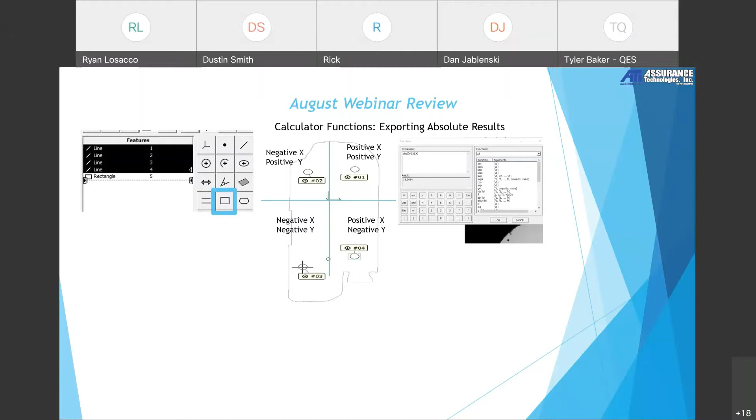So you can see here, when you do an origin to the center of the part, you have your negative X, positive Y, all the locations, but when you're reporting true position or some other dimensions, we can use the calculator function to convert those negative results into positive results for your reporting. I'll also show you, we're going to be talking about proper skewing today to align your part, which might help some of you who have a wrong skew or wrong origin where all your numbers are negative. Hopefully the skewing will help you there.

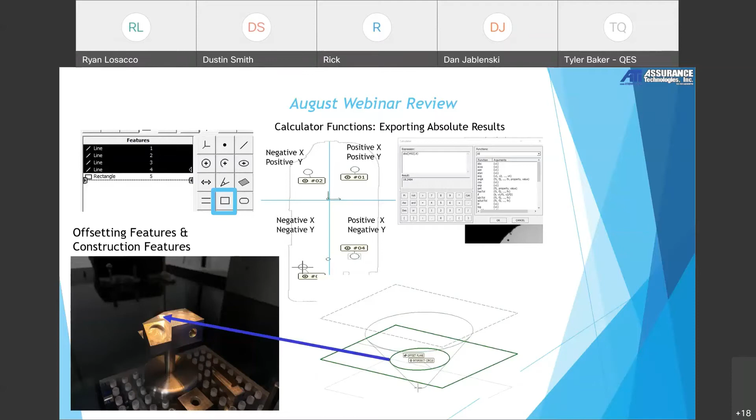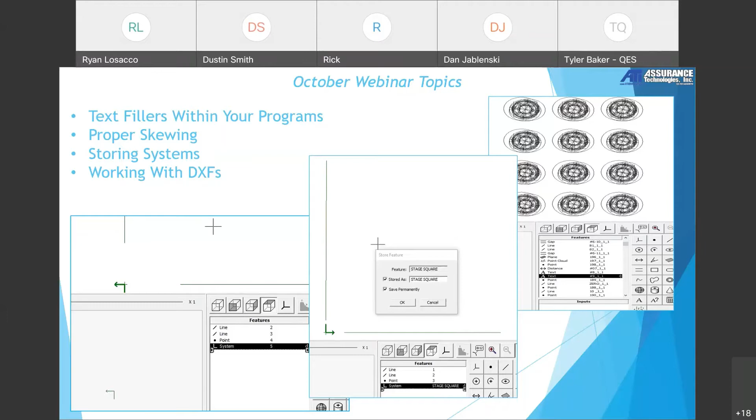So here with text fillers, if you are using the MicroVu for, let's say, half your dimensions or all but a couple dimensions, when I export to Excel in column B, I have all my actuals that I'll copy and paste to my official inspection report. But it always kind of annoyed me that if I was going to do some caliper measurements, or I needed to put it on a roundness tester or a Contracer or whatever it might be, I always had to copy half of the Excel sheet, paste it, and then go to the next form and copy and paste it.

What I started doing is inputting text. So if you do the A without a question mark, the text, and you label it whatever dimension you have going on, but you leave the text blank, then you can export that text. It'll leave a blank spot in your export to your Excel.

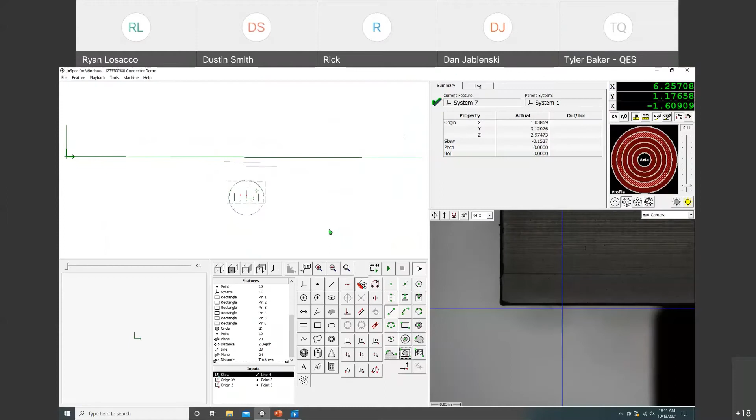So let's go ahead and jump over to InSpec here. I've got this program that I ran. I can move over here and show you the actual part so you guys see what's going on. Let's get that guy in focus. So I got this little headlight connector or whatever it might be. I have all my pin 1, pin 2, pin 3, and all these other dimensions going on here.

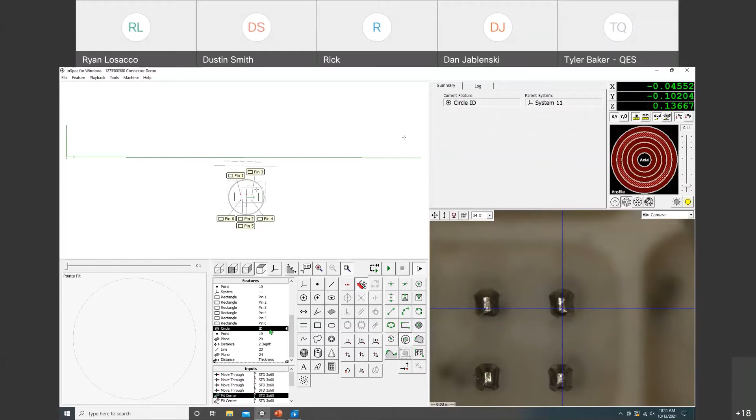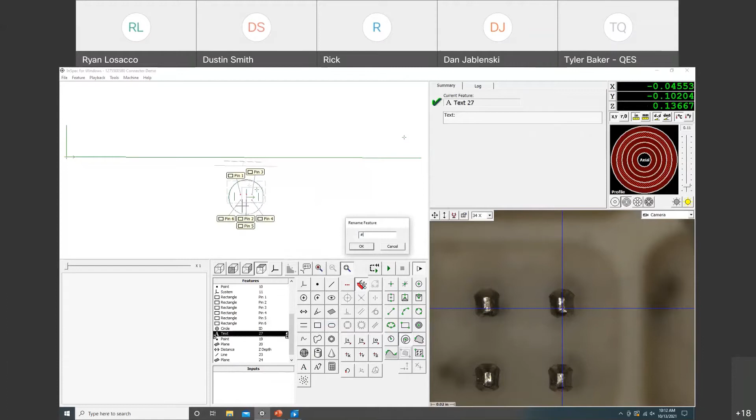But if I was going to measure the ID, let's say with a caliper or with a CMM or whatever it might be, or maybe a dimension after that, in my program, I would click text. I would leave this blank because this is what's going to export to the B column. Click OK, and you can either right-click rename or hit the F2 button if you like hotkeys. We'll call this dimension, let's say dimension 10. Click OK. And then if we hit F4 or right-click export, I can export the text and labels.

Leave it all blank, and then when we go to our Excel sheet, we will see it pop up like this, where there are blank cells in the B column. So then you can go in and type in your caliper measurements or whatever it might be, when you copy and paste it to your Excel sheet. So it's just a little trick I've been using to still fill out my full report and get all the dimensions I need, especially if you're translating, figuring out where those dimensions are can be a little frustrating. So hopefully that's useful for you guys. If you guys use the text input for any other sorts of tips or tricks like this, I'd love to hear about it.

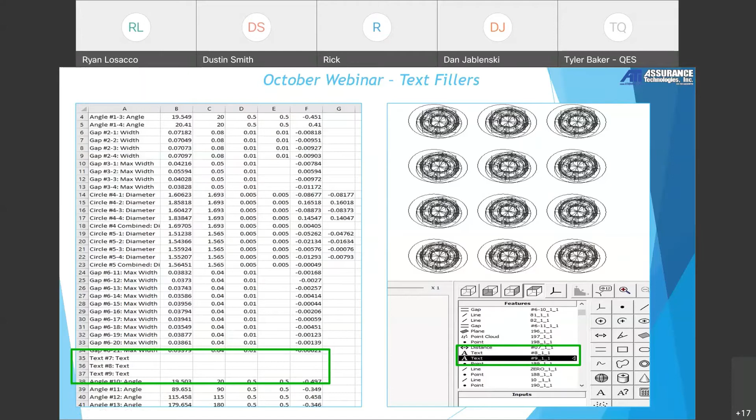Let's talk about proper skewing. Normally, if we have your part within 45 degrees of your X direction or Y direction and you hit skew and just click that line, MicroVu will know which direction it is. When programming, however you have that part within those 45 degrees of X or Y, you need to place it within 45 degrees of that same location every time.

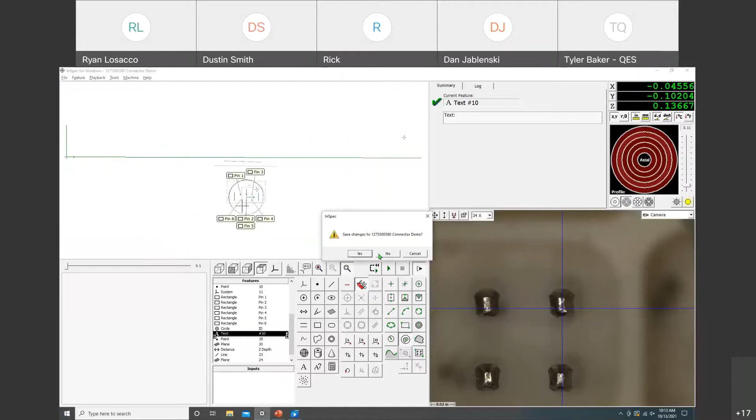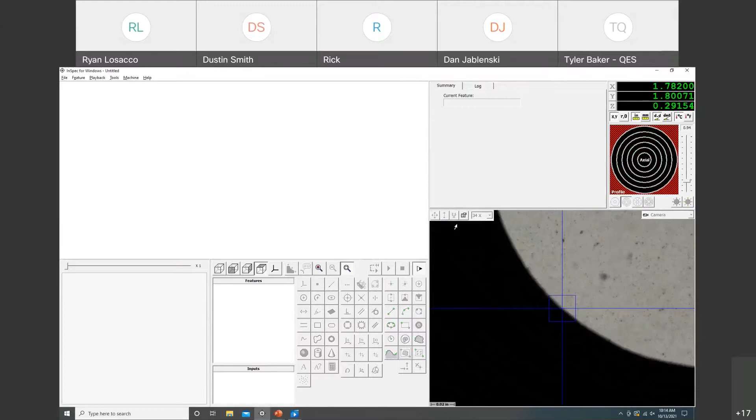When we teach you in the basic training class, let's come over to my practice slide here. A common system we use is a line-line intersection point. So I'll find the corner of this part, select line, F-scan line, F-scan another line, and now I'll find the point of intersection between those two lines.

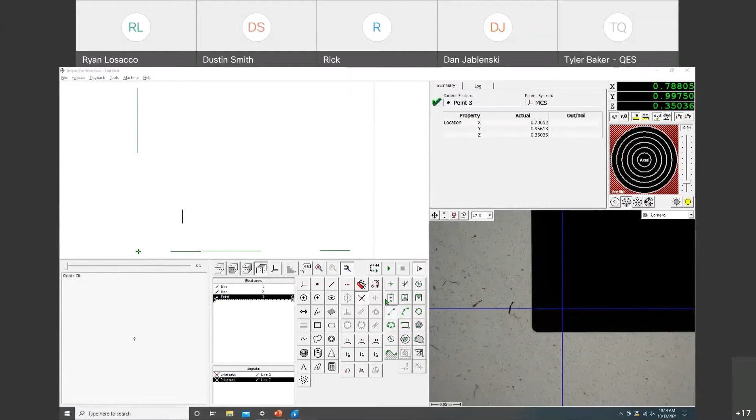When creating a system, the three most important things you need, as a review for first-time users, are an origin of X and Y, an origin of Z, and a skew. Right now I have my intersection point, which will be my origin of X and Y. I'll do my focus point for my origin of Z. And I already have my bottom line, which will be my skew.

So in our training manual, we'll have you go to origin, deselect Z, select our intersection point as origin of X and Y, then select our focus point. It's nice that Micro-Vu grays out all the features, but it still shows skew, almost like it's saying, hey, I still need this.

So if I click skew and select X, and we click this bottom line, it matters whether you click left to right or right to left with your F-scan line. If you don't select X and just apply skew to this bottom line, and that line is within 45 degrees of my X direction, it knows that's my skew in X and applies it. Same thing with Y. I was just at a customer site, and I always lean toward skewing to X, but all their programs skew to Y. So whichever one, you can apply it for Y or X.

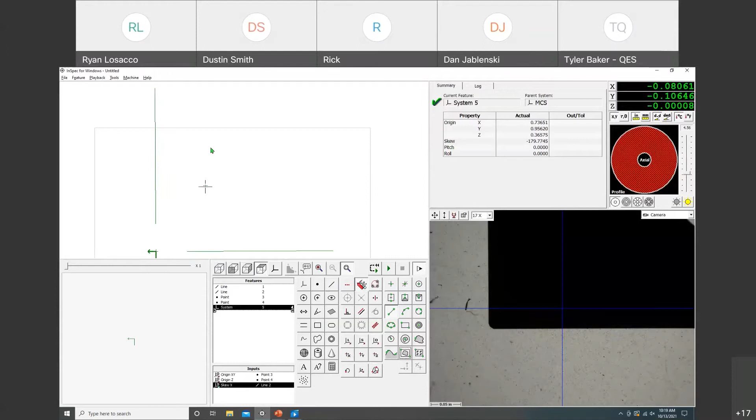Now what I mean by that, in case that's confusing, is if I skewed X to this line, since my origin is positive in X going to the left instead of the right, and my positive Y is going towards me, towards the front of the machine, everything below it is negative Y. So all these diameters, an F-scan circle here, my center X and Y are negative numbers.

And sometimes if you're just copying and pasting out of the Excel sheet, you don't want negative numbers, you want absolute numbers. It's frustrating for them because they have to go and formulate all the absolute numbers with the calculator, but now since you just skew without clicking X or Y, they're able to do that.

So if you guys have existing programs, save a copy of your existing program in case something doesn't work, so you're not ruining the program. Go in, delete that skew X, click skew, don't select X or Y, click that line, and now all your numbers should be positive on there.

So again, just remember, however you program your part, you want your line, if you're skewing in X or skewing in Y, to be 45 degrees within the machine X or Y. And when you run the program, you want to do the same thing on there.

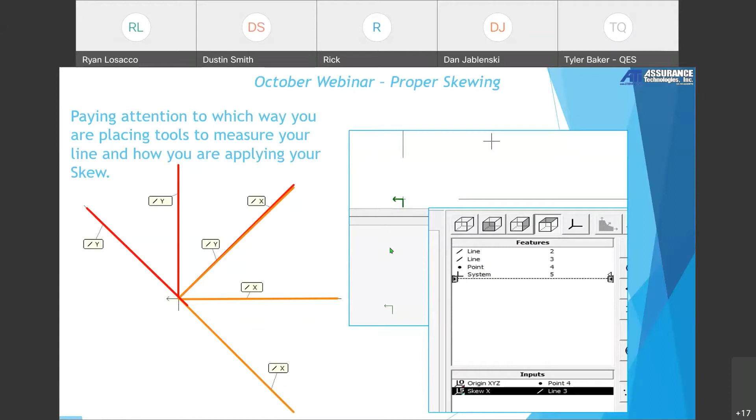All right, so now I want to talk about storing systems and common applications for storing features. We can store stage square locations, fixture plates. We can store datums to recall later. We can store features, maybe planes on the glass. So I'm going to show you these things.

And also, I'm going to show you, once you store a feature, if you get a new stage square or new glass, how to update those stored features.

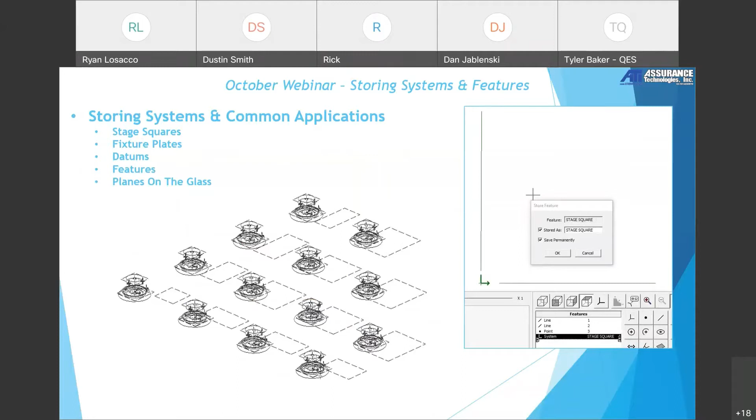So here's an example, we have this stage square that we custom made for a customer, and we want to save the location of this stage square, the theoretical intersection point of these two lines. Because when we take this stage square off and put on another one and then bring this back, we know it's not going to be in the same exact location.

Same thing with your machines, you want to store this feature, store the stage square feature, because when our calibration techs come, if they have to remove the stage square for any reason, or if you get new glass, your programs will follow this stage square recall feature.

And then when you get the calibration or new glass, you update the stage square location and it'll update your programs on there. So I'm going to start here, jump over to InSpec.

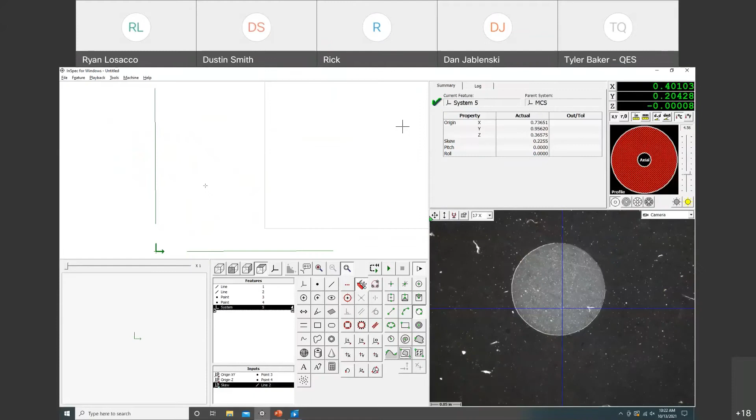So I got this stage square that comes with, if you buy a new machine, it comes with it. A lot of you probably purchased it with your Generation 2 machine. If you don't have a stage square and you would find it being useful to have one, let us know.

So here I'm on the Y-axis. I'm going to go ahead and do a new program.

So if you don't have any stored features, when you hit the recall button, you're going to just see the recall reference system, which is your machine 00, and that's what makes programs fully automated. At some point, we have fixture 23, datum A, whatever that might be. I might have done that in a previous webinar.

So I'm going to go ahead and measure my stage square. I'm down to the corner here. Get more inputs. Come over to my X direction, do a new line. Down a little further.

Do an intersection point between the two. And I forgot to make this fully automated, so I'm going to right click on my first feature, say insert here, and do my recall reference system.

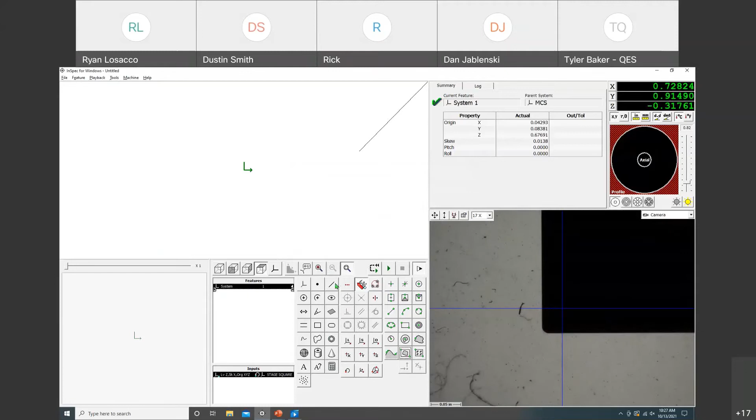So now, let's say that you move the stage square. I'm not going to bore you guys by taking the stage square off and putting it back on, but say that you moved your stage square and it isn't in the same location anymore, which means our parts aren't going to be in the same location anymore.

What I would do is come to my stage square, rerun this program, and since it's in the same location, it's going to hit the lines, but let's pretend that it doesn't hit the lines, which is good right there because I have the part in the way. So now I would come over here.

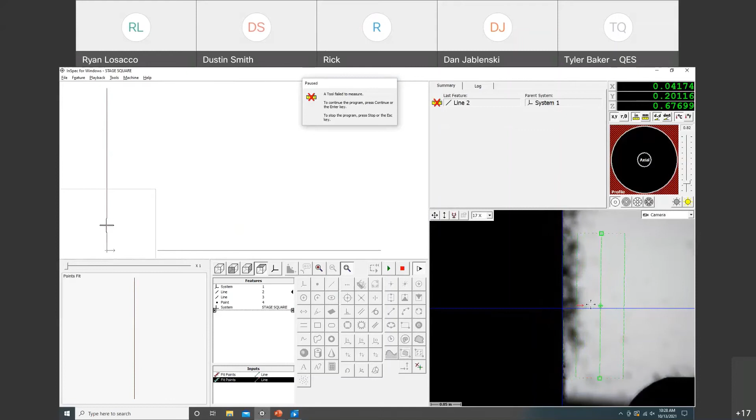Fix my tools. So if I move the stage square and it was over here and it failed to measure, I would just move my tools and run the rest of the program.

And then now what you have to do is save your program, because you want to save the new location, and you also want to store the feature again. I want to do both.

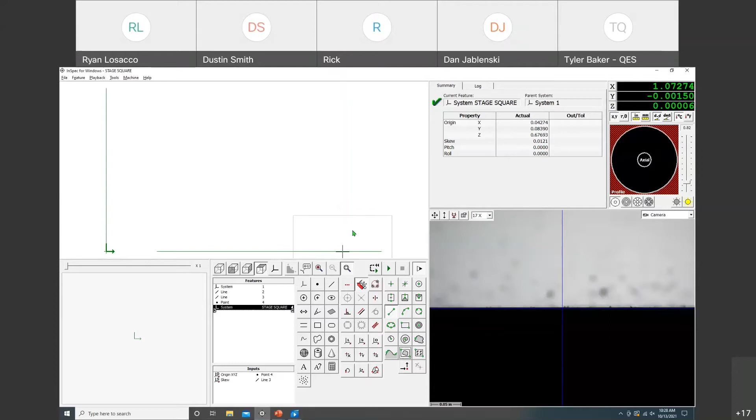I've seen it's a little wacky on my generation 2 - all I have to do is rerun the program and it updates everything and save it. But I always, just in case, go back and store the system again so I can reference it, just to be safe, and you did your job and it's all good there.

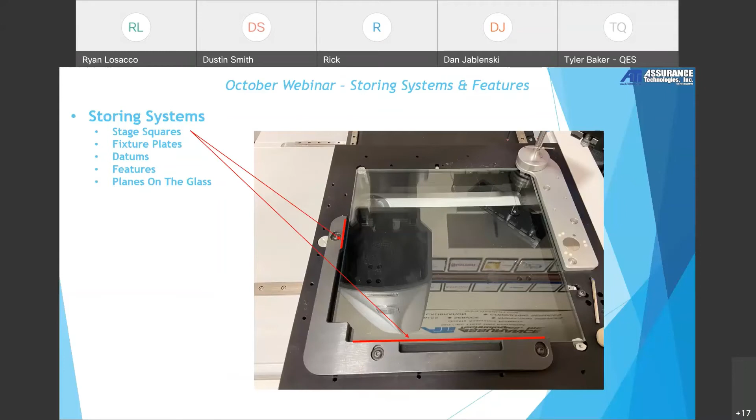So that's one thing that you might want to store. Other things that we can store are fixture plates. If you store your stage square, that's good because your fixture plates are butting up against your stage square. Your fixture goes there and they magnet onto there.

But you also might want to really bulletproof your programs by maybe saving the locations of a pocket fixture that you have, or locations of a certain place on your fixture.

So in this case, if I wanted to store this location on my fixture plate, but then for some reason I start using a touch probe and can't reach over to this location, I can update my fixture location to this pocket, so my whole program will move over here.

That's another thing too, you could do line intersection point on this pocket, or on this pocket, if you have other features on your fixture, maybe a more custom fixture that's been designed for you. It's always good to store your stage square system and your fixture plate system, just in case you use this fixture plate all the time and start scratching up all the acrylic plates. You guys want to make a new one.

As we all know, there's no perfect part or perfect manufacturing process. The fixtures might be a little bit different. Then you can go in and update your systems and resave them permanently, and it'll update your program.

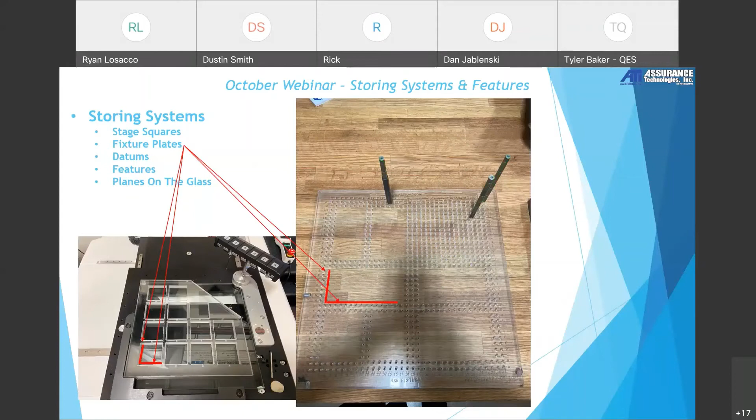Now, another thing that I like to do is if you have fixturing like these posts here, if I'm fixturing my part onto these posts and my part is sitting on datum A, so datum A is contacting these 3 posts right here, I can measure a plane off of these 3 posts, store that system, and then recall it, because once you put the part onto the fixture, you're not able to measure those.

And also, in some cases, if you measure the plane in the beginning of your program and then you put a prompt in to say place part onto the fixture, that's just an extra step that you have to do.

So what I like to do, let me switch over to InSpec. I'm going to switch out my fixture plate to posts that are similar to the ones that you just saw on the slideshow. Now I'm going to turn on surface light so I can see my posts. I'm going to move over here.

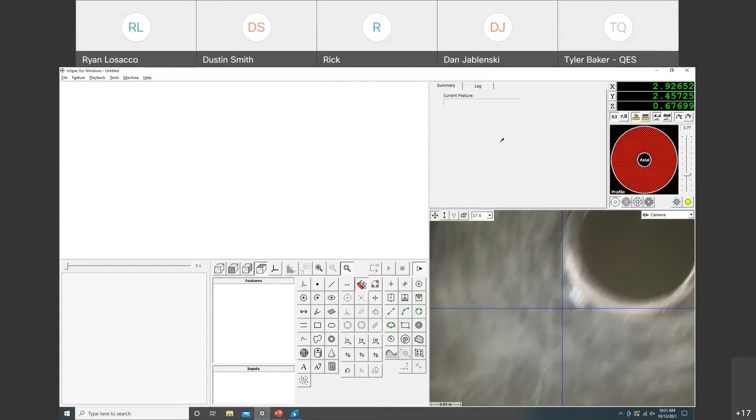Sometimes the hardest part is finding the location, isn't it?

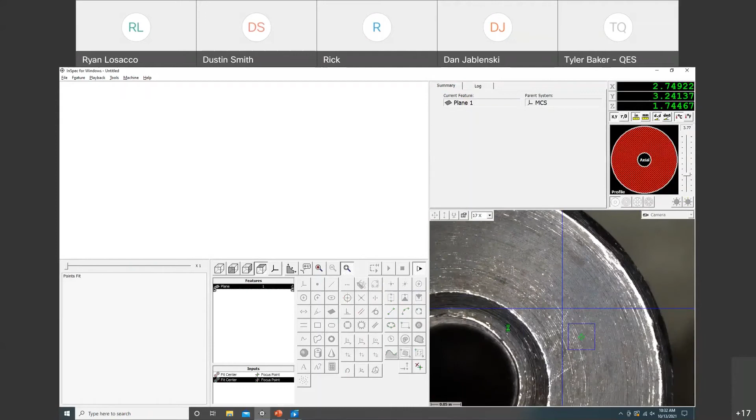So I'm going to go ahead and create a plane. It's datum A. I'm going to do more than 3 inputs. Since you're not going to have to run this every single time on your program, because it's going to be a stored feature that's just going to recall, you can go not overboard, I'd say, but you could do 3 points on each post just to really ensure that you're measuring datum A correctly.

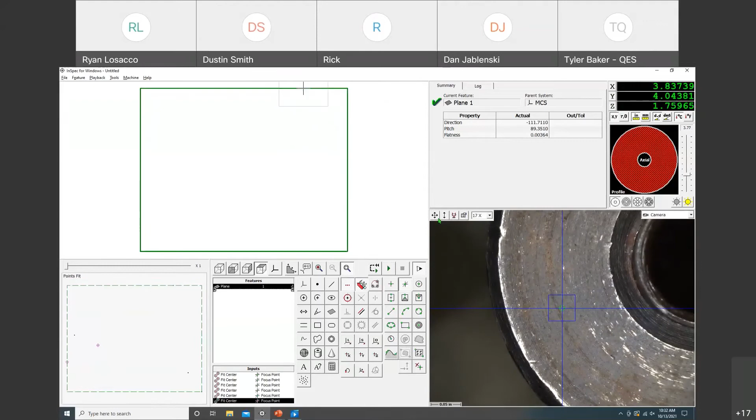I'm going to take a couple more focus points here. Now, ideally, these fixture posts, they've been beat up, we've used them for years. If you're going to do this, where you're going to set datum A onto these, you might want to have a nice machine controlled surface that you're placing them onto, whatever it might be.

So same thing, just like that system, we can store features. I'm going to rename this guy datum A for part 1, 2, 3. And I'll right click that feature, store system, save it permanently.

And again, you can save this program in a safe location. So datum A, part 1, 2, 3. And now when we go to create a new program, we can recall our stage square.

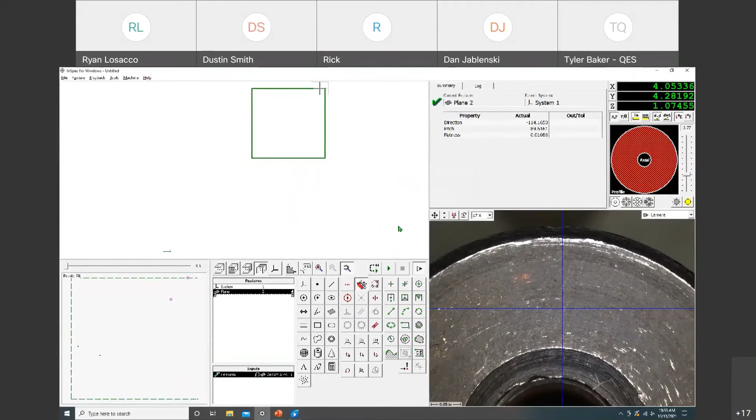So it makes it fully automated in relation to our stage square. Then I can recall datum A. So there it is, and it's going to recall it. It's not going to have to measure it. And then you can go on with your program and measure everything.

And then you can reference features to datum A, even though you can't physically see it because your part is on top of those posts there. So that could be useful, or if you have a fixture that kind of clamps down your part and you have an alignment that's underneath your part when you clamp it in, this might be a useful thing.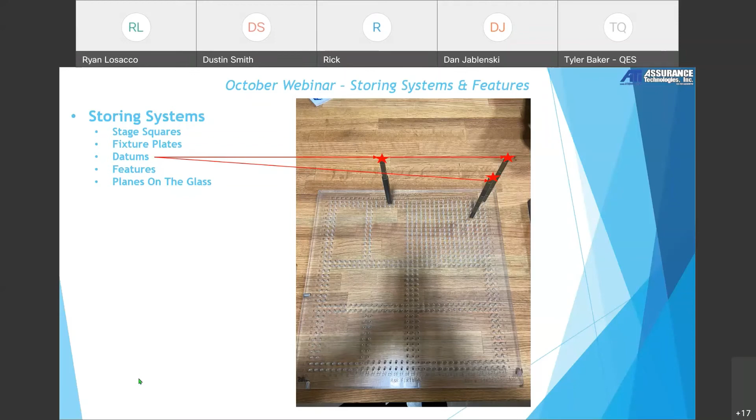So the best piece of advice I'd say for trying something like this for the first time is try it out, do a study, make sure that you are getting the results you want. Sometimes since you are storing features to a fixture, and the fixture might have a better tolerance that it was made with, you're getting too good of results on your, say, plastic parts, so just have that caution and make sure that what you're storing and what you're reporting is accurate and works for your process.

So I also did this if you are measuring multiple parts on a pocket fixture like this. I went and stored each pocket plane off the glass, because if I'm placing a datum onto the glass and need an overall height—for example, on these parts, from the glass that the datum is sitting on to the top of the part—it was really nice to just recall each one of these planes off each pocket fixture. So if you use this pocket fixture for multiple part numbers, all you have to do is store the planes once for your glass, then recall it for whatever feature or part you have in each pocket. Again, save the program.

If you get a new piece of glass, or when our calibration tech comes out to calibrate your Micro-Vu and re-levels the glass if it's unlevel, you'll want to rerun all these programs just in case.

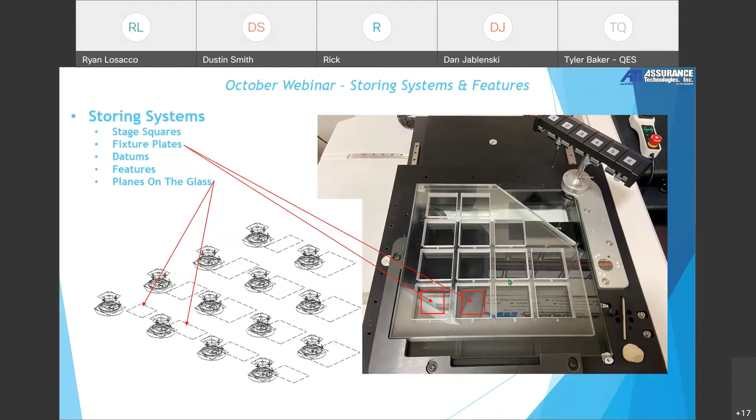Hopefully that spurred some ideas for you guys. If you have any challenging fixtures that you're making in-house, or if we've designed them for you and you'd like more advice, feel free to reach out to us.

We'd love to help. So now let's talk about importing a DXF. We've talked about importing DXFs before, how to bring them into your InSpec software, how to program offline with them. But I want to get into a little more detail about the different tools that are created. Basically, when you import a DXF file into Micro-Vu InSpec software, it converts the lines that you or your engineer designed into measurable features using Micro-Vu scanning tools, best edge points, whatever it might be.

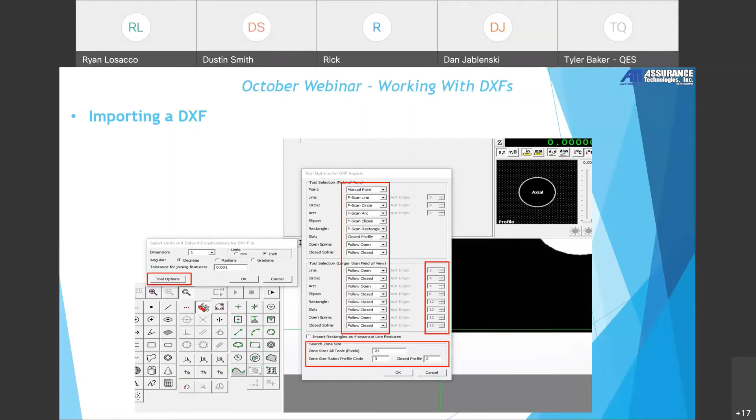So if we go to InSpec, then file new—if you guys want to practice importing DXFs, you all have the good old practice slide. If we go to C drive, x86, down to Micro-Vu Corporation, InSpec for Windows, you'll find the DXF files at the bottom of this folder, or with the new generation machines, it's in the samples folder. I'll open up the sample DXF.

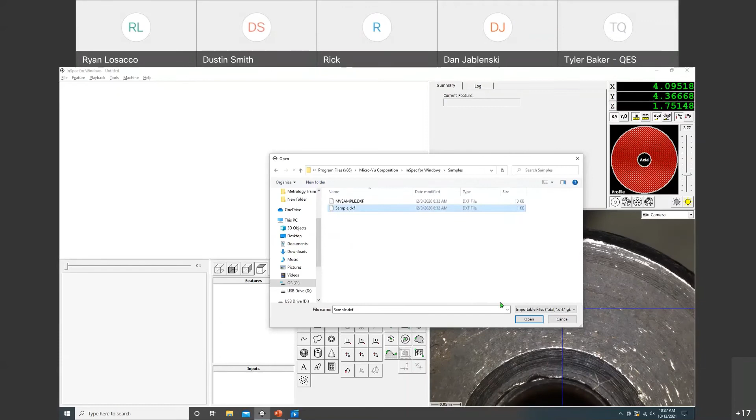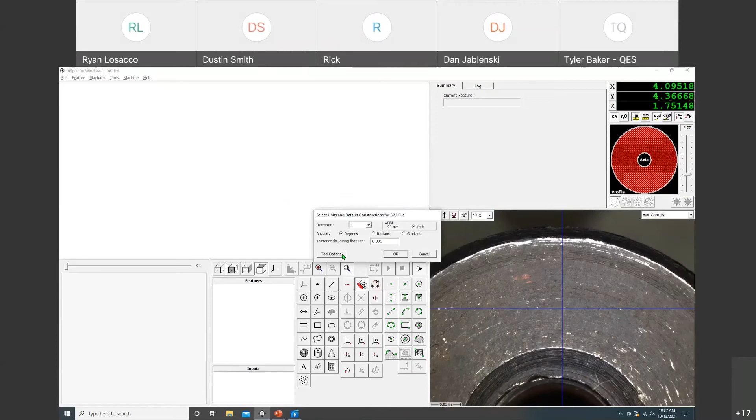So the first thing that pops up is this window. If Dan or I have been at your location to train and done advanced training, we've probably switched these options for you. But what we think is best doesn't mean it's best for your part. So if you want to change something, or if we haven't been out there, you can go change these. Now this is a global change, so when you change it once, it'll do it for any future DXFs you import. If you have multiple programmers or operators, you might want to get together as a quality, engineering, or production team and decide what you want these tools to do and which ones to use.

So there are two major fields here where we want to make sure we're selecting the right ones. When you import a DXF, if the camera window—the field of view—can see the whole diameter, these are the tools it's going to use for a circle or a line, whatever it might be. I always recommend using F-scan tools just because they're more repeatable, say 80% of the time that I've seen, instead of using best edge points. Also, it runs faster in the program.

Circle, same thing—you could do best edge points or F-scan circles, so select whatever you'd like here. I'd recommend if you're more of a best edge programmer, use best edge, or F-scan. Don't use closed profile or profile circle—I don't see a lot of repeatability with these two tools.

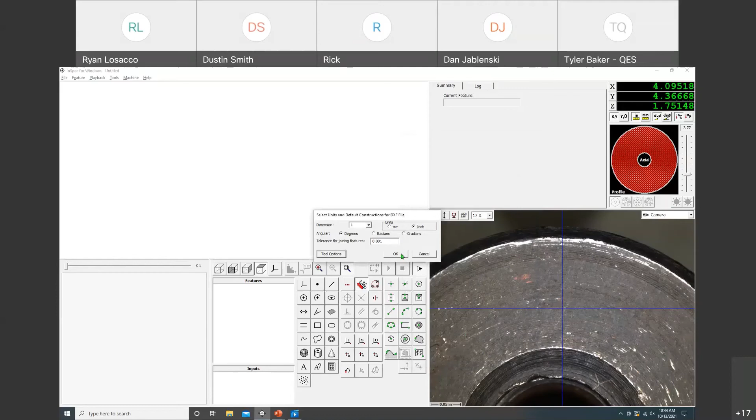So we got our handy dandy practice slide here. Let's put that back on my stage.

So I'm going to set my intersection point. I'm going to set my origin to that intersection point, and I'm going to skew that line. Next, find it.

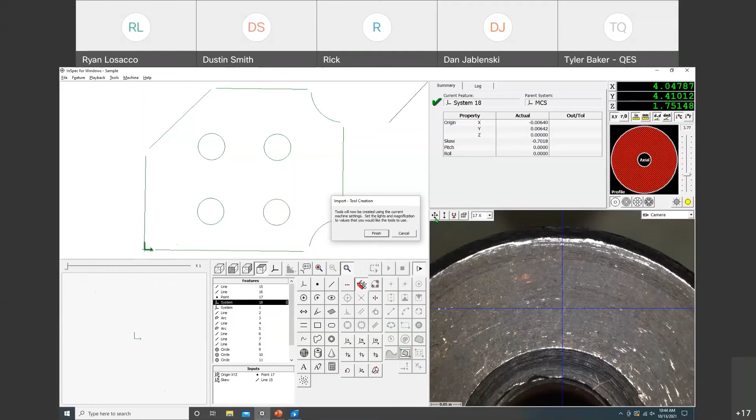Now I'm going a little fast through importing a DXF here. Like I said, we've done that in the past. If you want some help importing a DXF, feel free to reach out or go into your advanced training manual, and you'll be able to find all these steps that I'm kind of flying through here.

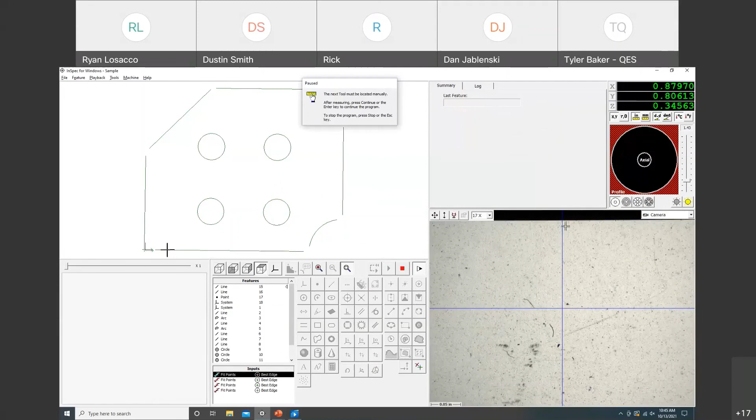And now I'm going to run my program. Now when I click this tool, I did 24 pixels—can you guys see how small that tool is right there? Because this Gen 3 machine can see 24 pixels within that. On a Generation 2 or 1 machine, that's about 24 pixels on your Generation 2 machine. So 24 is a good size for Gen 2. For Gen 3, we're going to be missing all of our points using that.

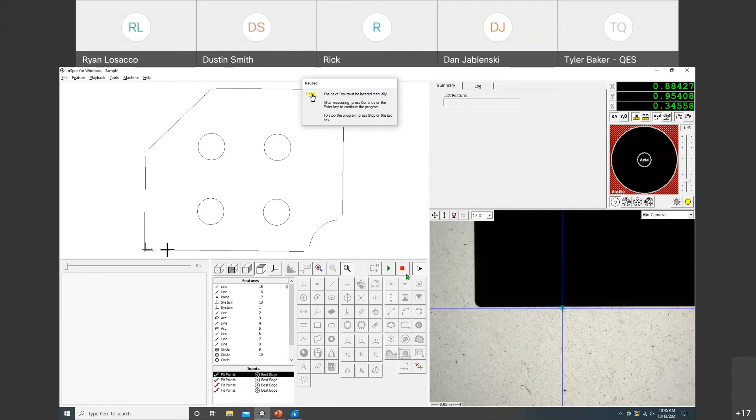I'm going to come in, re-import the DXF and show you what happens when I change the pixel size. I'll go into that little tools menu. I'm going to jump it up to 100 pixels. Click OK. I do my intersection point.

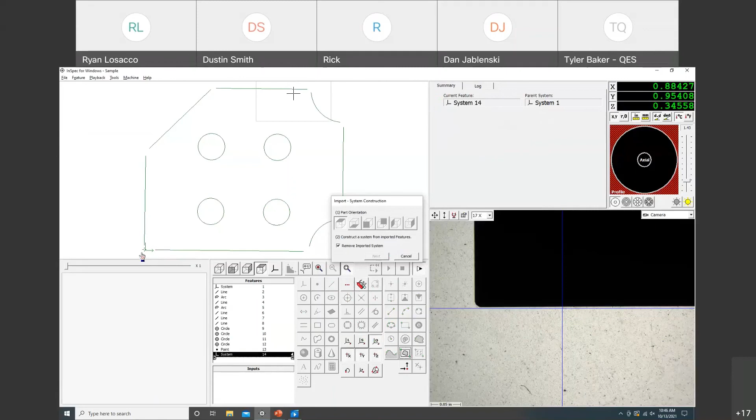Set my origin. Skew. Notice I'm not clicking X. Next. Finish. And now when I run it, see how my tool, as soon as I click it, I didn't adjust it. That's 100 pixels that it can see in that best edge. So on a Generation 3 machine, I actually might bump it up to 150 to get maybe a best edge about that size going on.

So go ahead and play with it, see what's easier, because if you're importing a DXF and maybe you're making gaskets that have 10 thou tolerances on it, your part could actually be here and all your tools are failing to measure—it could be helpful to make your search area a little larger. But make sure you don't make it too big, because it could fault out on you and not know what edge it's trying to get on there. So find a nice, comfortable size that you're looking for, and then from then on out, use that as your pixel size, your search area size for your DXFs.

I was actually talking to a customer this last Friday that's having difficulty understanding what their customer is using to measure their parts. So if your customer has a Mitutoyo vision machine and you have a Micro-Vu, it's kind of nice to go through the quality show, see all the different vendors, see the different equipment that's out there, so you get a little more familiar with what's going on, and see all the different ways to basically get the same results, but different softwares, different machines. It'd be really good to see.